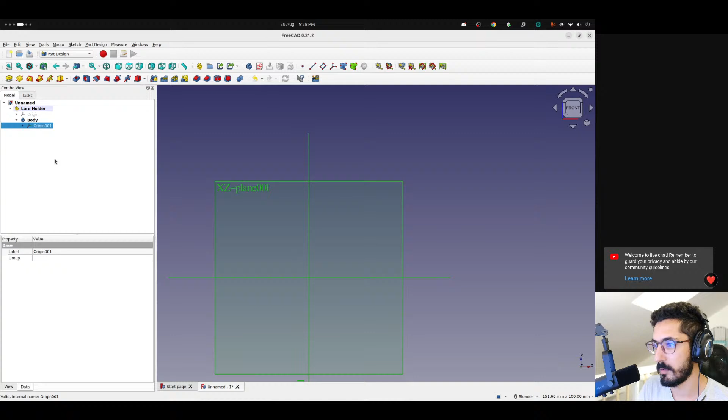But yeah, and as always, there's going to be spreadsheets, the boring stuff. I think for this lure holder we'll only need one spreadsheet. I could not rename it, but I like to rename stuff, like for example lure holder params. So here we will have the parameters for our lure holder, and from the top of my mind, just a diameter and a length for now, and then we'll get back and start adding more. So let's assume the diameter is like 15. Again, might change it. Let's go with 20, and a length of 120.

Also, I'm starting to add the units to these. I wouldn't say it makes things easier, because I could just say 20 and it will work. But yeah, this will make sure that this is actually a distance. We're gonna name this diameter, and this one length. Cool. Diameter and length.

So I think I'm gonna have it standing up. So I'm gonna go to the top, and that's one of the reasons I created a part. So let's call this the main body, for example. And we're gonna need a couple more bodies in a minute to do Boolean operations, because the thing with bodies is every single body can only have one solid inside of it. So if I want to do a Boolean operation between two solids, I must have two bodies, basically.

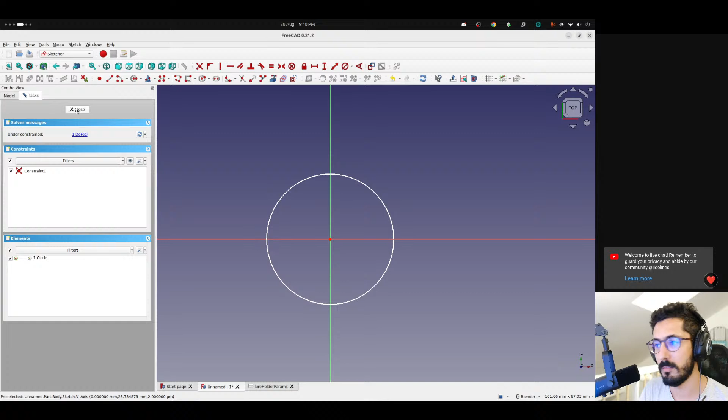So we're gonna start by creating the most simple shape possible, which is gonna be a cylinder. By the way, we don't even need a sketch for this. Let me show the origin. Technically, I can attach a cylinder from here. Attach it to the XY plane. Give it a radius, which is going to be lure holder params dot diameter divided by 2, because we need the radius. And the height is going to be our length. Cool. We didn't even need the sketch for that.

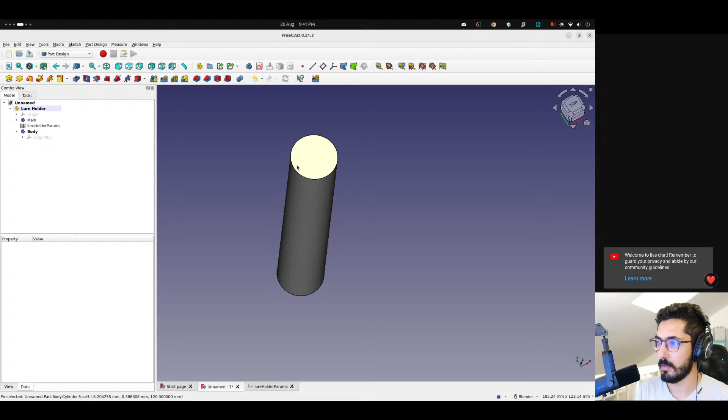And now we are going to create another body. Let's call this body. That's fine. It's active. Make sure it's active. That's important. Because I could leave it as a cylinder, but it's not gonna be strong if I print it standing like this. It's gonna be brittle because there's gonna be layer lines and we're relying on layer adhesion. There's some intricate parts here, so yeah, not ideal. So that's why I want to do a Boolean operation.

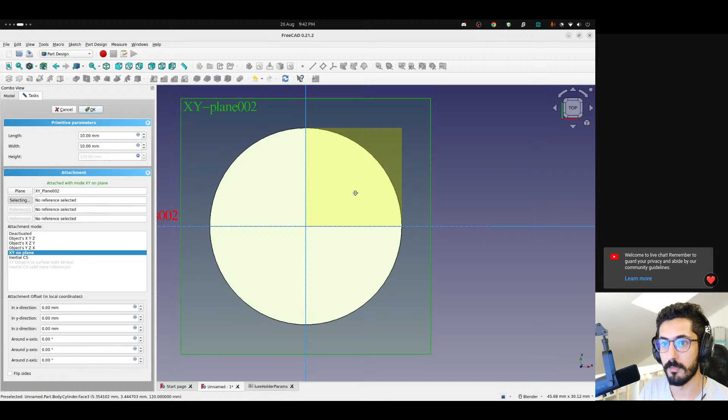So with this body activated, I'm thinking to create a box on the XY plane. So the height is going to be the same length. We called it length, I think. Okay, so it's not centered. We will fix this. 1 second. Width is up. It doesn't actually matter. So one of these will be equal to the diameter. Lure holder params dot diameter. And actually, you know what? I'm gonna add 1 millimeter, just in case. You'll see what I mean in a bit.

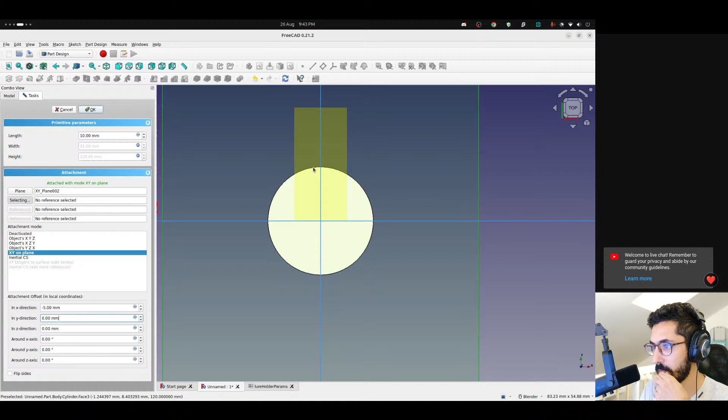Let's leave this as 10 for now, and then we'll get back to it because I don't know yet exactly how it's gonna be. But assuming this is 10, we need to go here by -5, so it's in the middle, and in the Y direction, we need to go by minus the value we entered, which is lure holder params dot diameter plus 1, divided by 2 mil. Cool. So the gap here is not necessary, but it doesn't actually matter.

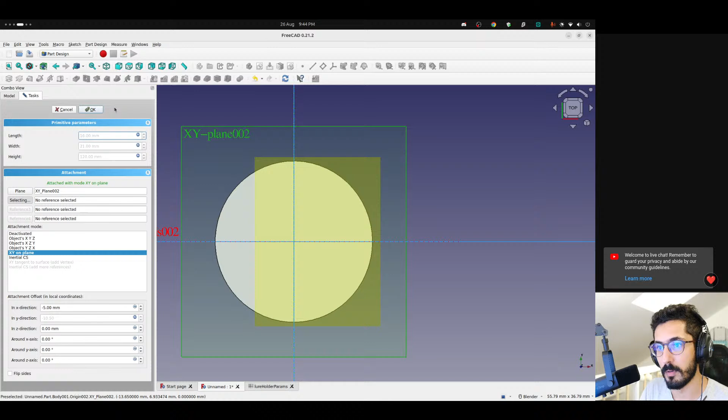Now here, I want to know how much I want to cut, because we're gonna do a Boolean operation between these two, and I want this to be something relative to the diameter. So maybe like lure holder params dot diameter multiplied by, I don't know, 0.8 probably. So we can take this value here and turn it into a parameter, let's say cutout percentage maybe.

And can we do percentages here like 80%? Does it work like that? I've never tried this, so we will figure that out. So if we multiply this by lure holder params dot percentage: cannot convert str to number. Okay, so it took it as a string, not a value. I guess this is gonna be like 0.8, right?

Or what I can do, which is even better, cut out length and then say this will be equal to length multiplied by 0.8. And then we can use that here. So that's gonna be... forgot to change the name. That's not even a cutout. Let's rename it. Let's call it box length, because the actual cutout is different. So that's gonna be the box length.

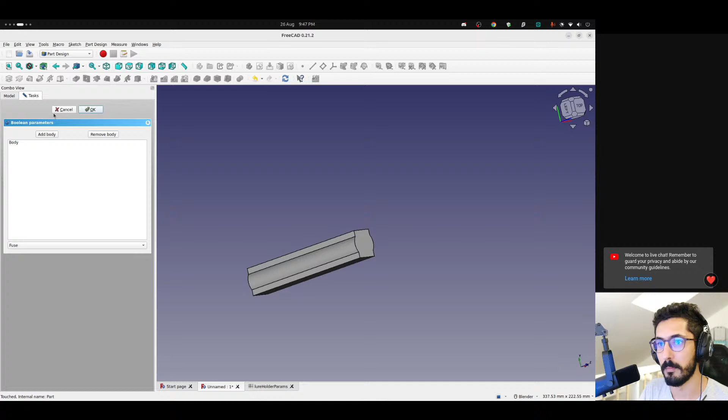Interesting. I took the length. Oh my god, it's diameter. And in the x direction, there's going to be minus the box length divided by 2 to center it. And now we have these two shapes. And if we go back to the main shape, we can create a Boolean operation. And we need to add our body

and get the common value between them. So this is going to be much easier to print because I can put it on the bed this way. So basically it's printing like that horizontally. It's going to be easier to print and much faster. Easier, faster, and stronger also, which is always nice.

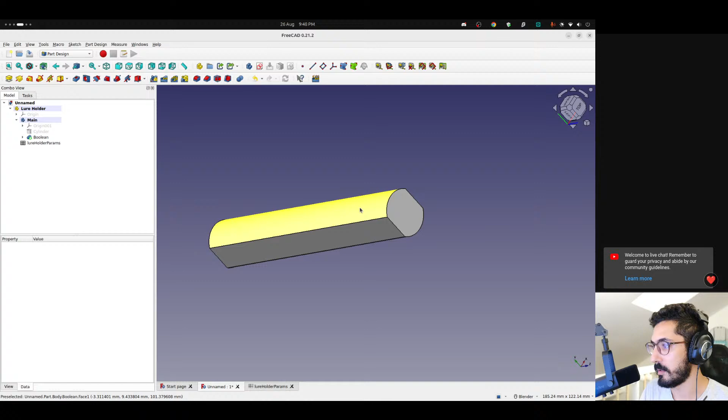Cool. So what we need to do is to also create a cutout somewhere here. We need to create a cutout. We need to add threads. And we need a way for whatever being threaded here to close this part. Yeah. I'm thinking now because maybe I shouldn't have done a cylinder. Maybe I actually needed a sketch that goes like that, but then here at the end it goes this way. Probably. We can still add it though.

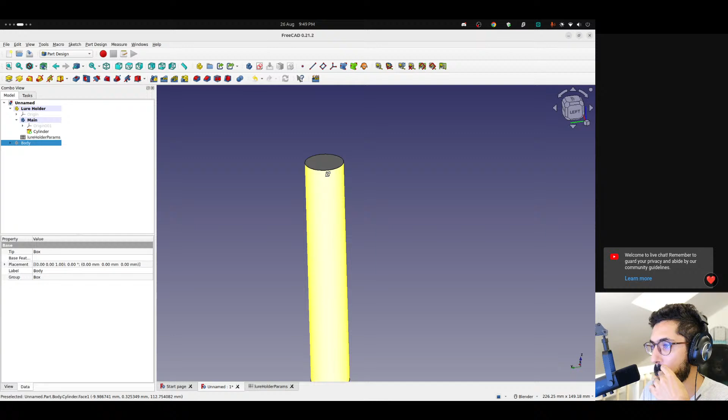Let's delete the Boolean for a second. I'm gonna hide this. Yeah, let's hide it for a minute. We can still add it by... We can make a bigger cylinder, extrude it downwards and change the angle. We don't have too much control over that. Or we can make two cylinders and loft it. That's one way. Or we can draw a profile and revolve it. So there are many ways.

But do we still need this cylinder? Okay, let's delete the cylinder and start from scratch. We actually needed that. My bad. Okay, so the total length is going to be our length. Cool. And we need the basic shape of the cylinder, the side profile of the cylinder, but not all the way up. So this right here is going to be half our diameter, which is in this case 10 millimeter.

Cool. Okay, so here's the tricky part. I was thinking something like that. But how much is it and what is this angle? So the angle, I think we can go with 45, maybe even less. And do we need a fillet? We can chamfer later actually. 45, maybe it's too extreme. Maybe something like 70. And I guess we can do something here like lip angle. Set it to 70.

I think we need that. 70. Yeah. That's how you set it in degrees. So this is going to be our lip angle. Cool. And the only thing that we need to define right now is this length. So let's call this the top diameter. And maybe 22. Yeah, so this is gonna be our top diameter.

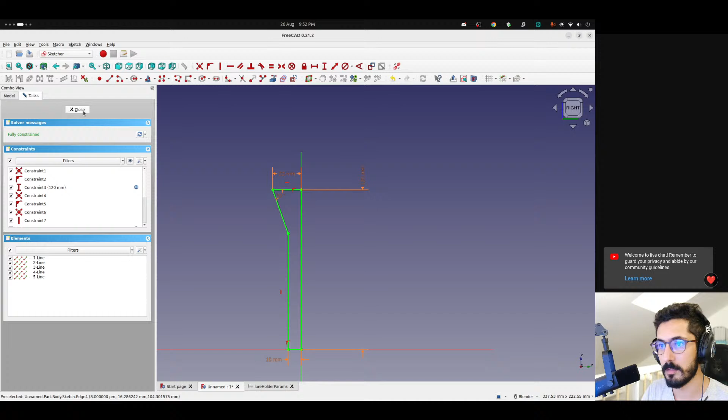Yeah, and we don't need much, by the way. I think like even 1 mil could make a difference, but we'll see, and maybe we need to reduce the angle. Maybe 45 was fine. 50. It's not updating. Huh, something is wrong. Oh, yeah. That's top diameter divided by 2. Okay, that's why. Yeah, I'm gonna leave this at 70. That's why it was weird. So this is what's gonna push the two parts together, basically. Or at least that's the plan.

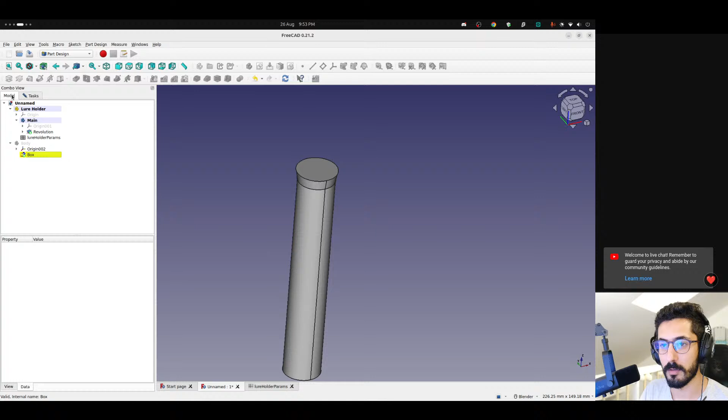Now we can revolve this 360 degrees. Maybe we can make the angle even bigger, like 80. So it's gradually going down. It's looking nice, not bad. So now we need to modify our box. Because, first of all, show me the box. Because now this is bigger, so we need the width. Is it width? We need to get the top diameter now. Top diameter, there's a unit mismatch. Yeah, this should be millimeters. Width is top diameter.

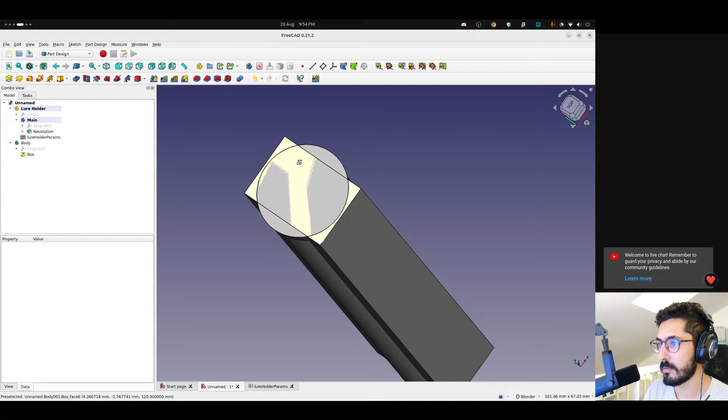And we need to change something else, which is here. Yeah, top diameter. Cool, now it's centered, nice. Now we can come here and redo the Boolean operation. Boolean, add the body, select the body and set it to common. Cool. Nice. So let's now define the cutout length. Do we need to create one cutout? I think, yeah, because it's gonna be printed on one side, so cutout should be here.

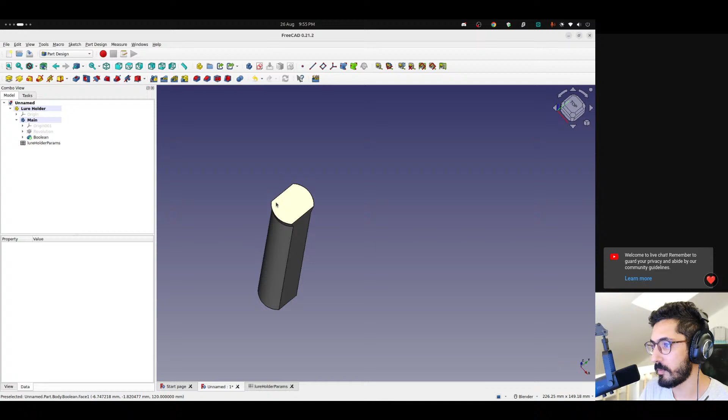So cutout length, let's do, whoops, not here. Let's do 2 mil for now, and we will modify it in a bit. And this is the, what am I clicking? Ah, come on. Here, yeah. Now we're fine. Cool. So we want to draw a sketch here. So I'm gonna create the datum plane. Create the datum plane, attach it to XY plane, and in the Z direction, we will go by the total length.

And let's draw a sketch here. This is a very simple sketch. So a centered rectangle, centered around the circle. This right here is going to be our cutout. So cutout length. And now the length of this one, let's just set it to the diameter.

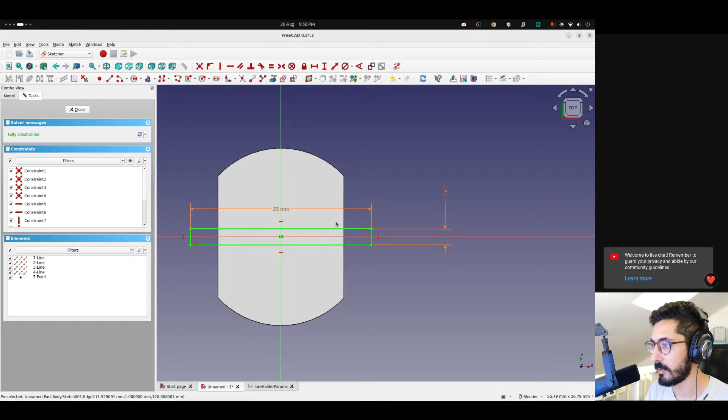lure holder params dot top diameter, and just because why not, we can add 1 mil. Doesn't matter. Close. And let's say we need a cutout depth also. Let's make this one 6 mil, probably more, 12 mil. And the cool thing about parametric design is I don't even know if I need these values to be correct. They don't have to be correct at the moment because I can change them at any time. And I like that.

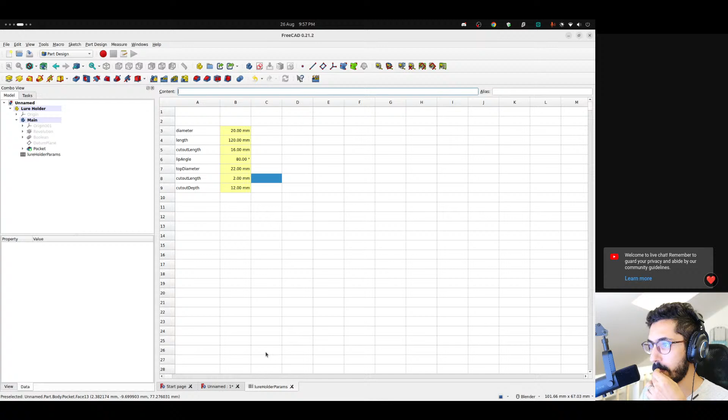So cutout depth. Nice. Now this is probably too thick and we might need to reduce the diameter or increase the cutout. Something like, let's say 3, and we have a top diameter. Actually, you know what? The top diameter, I'm not gonna calculate it like this. I'm gonna put it somewhere here.

And let's call this one top diameter offset, for example, and set it to 2 mils. This is not gonna change the actual value, but it's gonna make more sense. So this is gonna be diameter plus top diameter offset. It's still 22 mil, but we have an offset now.

So why did I do that? Because now if I change this to, let's say, 14, change it to 140, 14 mil. The top diameter is now 16. So I maintained the 2 mil difference between these two. This looks more realistic now. These two will bend a bit

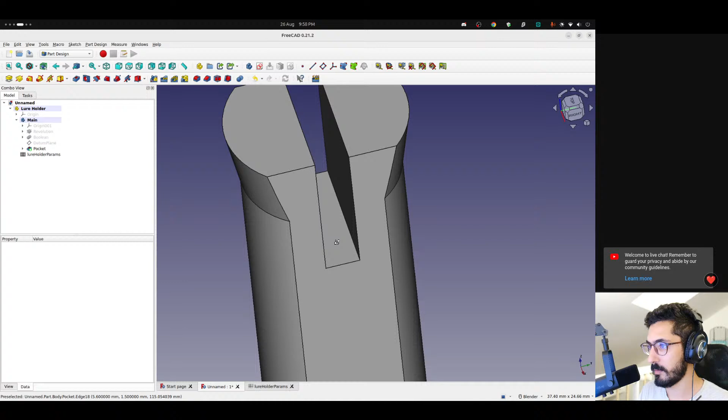and should work. Cool. So now we need to create the thread and the screw. That should be it. It should be a simple print, theoretically speaking. Now I can do everything in one spreadsheet, but it might become a bit slow, especially the thread part. So I'm gonna create a spreadsheet just for the threaded part, because every time I work with threads, it just becomes slow.

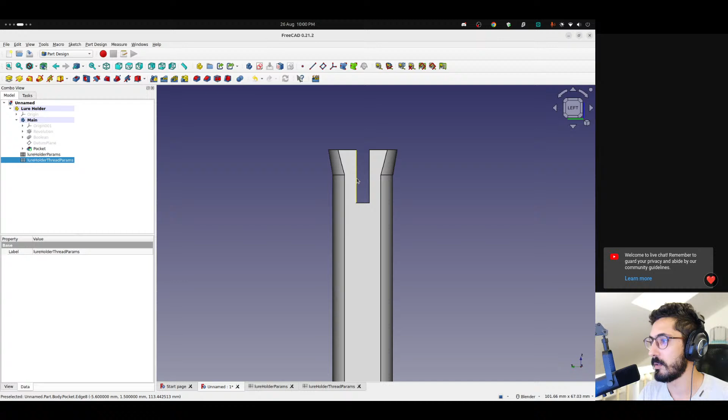Let's say lure holder thread params. So for thread, what do we need to know? We need to know, let's say, the length of this thread. So let's say it starts from here all the way up here, for example. I think it should stop somewhere below this, because if we add threads here, it's going to reinforce this section. So it might not bend well. But anyways, let's define a thread length.

Let's say it's 30. Whoops, giving it an alias. Why am I clicking all over the place today? Thread length. Oh god. Man, I used FreeCAD millions of times and now I just forgot how to use spreadsheets. Yeah, so thread length, and

probably I'm gonna start the thread right after the cutout, so I don't need a param for that. Maybe offset from cutout so we can control it. So I can set it to 0, I can set it to minus, so let's say 2 mil, for example. So the thread will start 2 mil from here, somewhere here, and then it will extend 30 millimeters down.

And usually I like to create these threads as a circle, so let's give it a threading diameter, for example. It could be like 2 mil. Again, we can control these values, so that's fine. And let's add a tolerance of 0.2 mil. That's the threading diameter, that's the tolerance right here. Cool. Thread length, offset. I think that's enough.

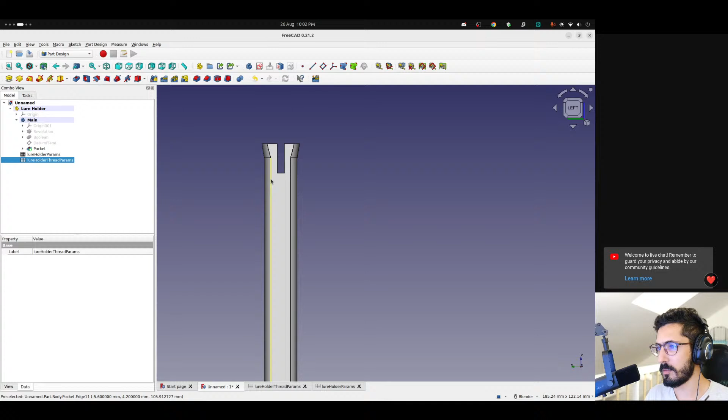So the thread will be here. It's gonna be like a reverse of what you usually see on bottle caps. No, actually it's the same. Anyways, let's draw the profile of the thread. It will start from this edge, for example. Now I'm thinking if I do a boolean or not.

Yeah, I think the boolean operation has to be the last thing. So I'm gonna delete the boolean and hide it for now. So this is gonna be like a perfect circle. We're gonna do the thread and whatever changes we wanna do here, and then we do the intersection.

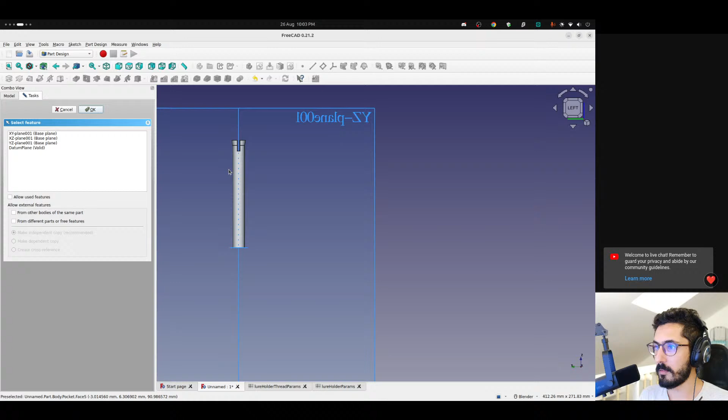So let's create a sketch here. We're looking at it from the right. I don't think it matters. Yeah, it shouldn't matter. So we are going to create a circle. This circle will have a diameter of lure holder params or thread params, threading diameter.

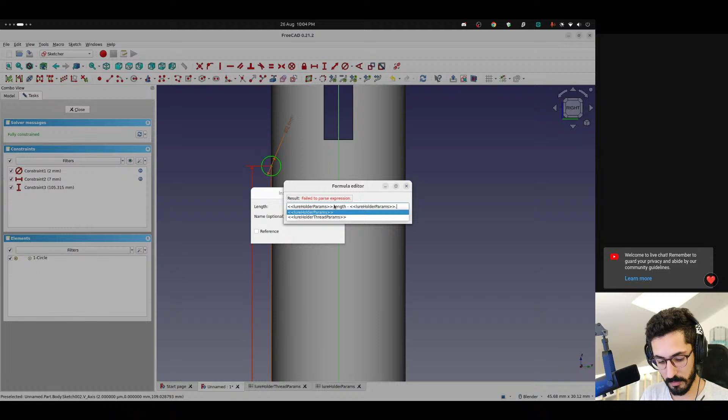And where do we want to put this? So we know that the distance from here till here is basically our diameter divided by 2, the radius. So now we cannot move it left and right. And where do we want to start? So let's go from here to here on the vertical distance. We want to go up by the length, so the full length minus. We need to remove the cutout length or cutout depth.

Oh man, these names are confusing. Sorry, my bad. This should be height and this should be depth. And there should be no length. This should be width. Anyways, and we also need to remove from the thread params the offset from cutout. And I have a typo here. Let me fix that. Cool. So now this should be exactly 2 mil away from this line because this is what we specified here.

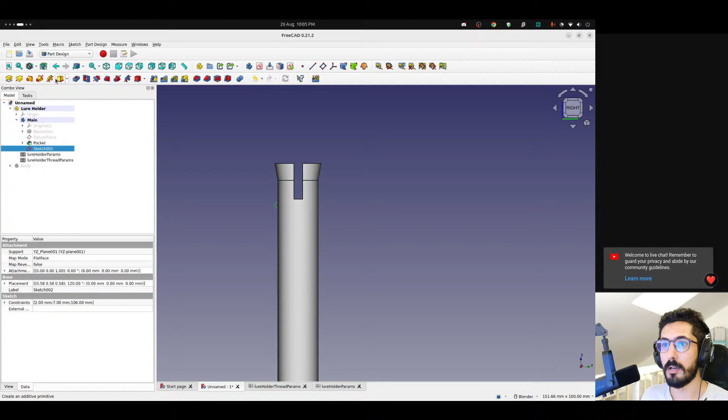So if we close this, I just want to remember that it's on the right side. Looking at the right side, it's on the left of the thing. Cool. Now we can create an additive helix. Okay. I thought it failed, but it didn't. Yeah. So we need to reverse it so it goes down. Nice.

And we have pitch height angle. Height turns angle. Pitch turns angle. I think, yeah. We have the height, we're missing the pitch. So let's set the height for now. And this is called thread length, which is going to be 30 mil. And regarding the pitch, yeah, this is gonna be a param. So I'm gonna set it to whatever for now.

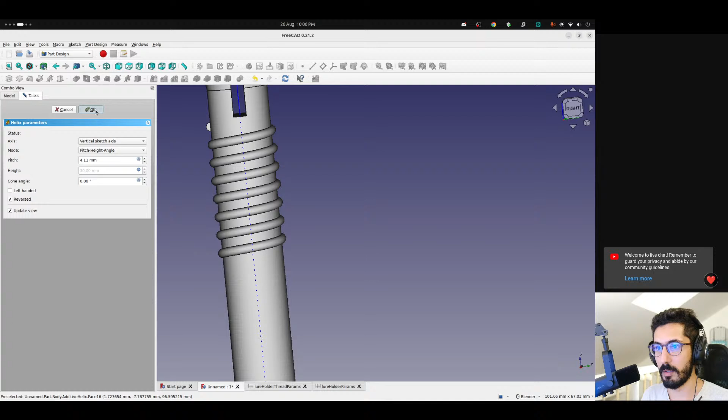And then let's create pitch, and I should save now. Let me save because we're getting into dangerous territory. Let's call this painting accessories because we might add some stuff later. Lure painting accessories, copy that, save it. Let's do a pitch of 4.

So you see, whoops, no. You see it's getting slower, this spreadsheet, and that's why I decided to create a new spreadsheet instead of adding the values here in this one. This should be fast now. Like, for example, if I set this to 10 or not. Anyways, we haven't applied the pitch, so let's do that. Set it to 4 or whatever the value in the spreadsheet is. And now we have our screw or our thread.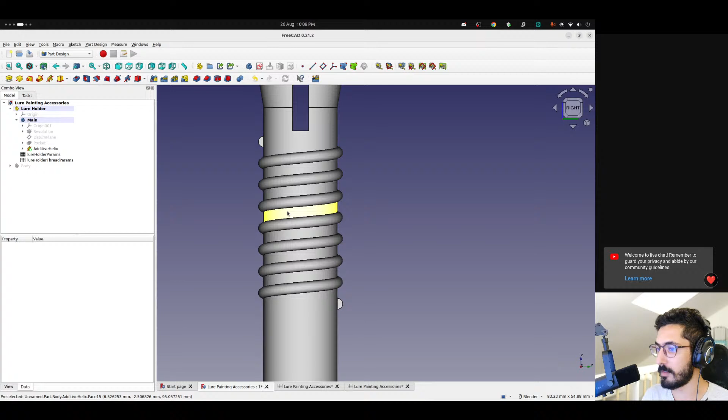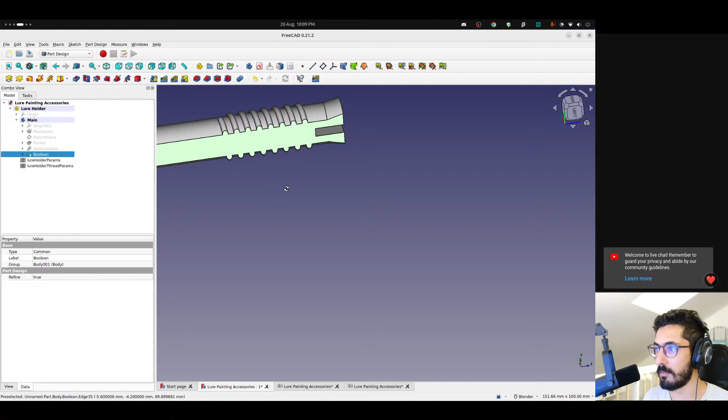We haven't created our screw yet, which we will do. So for the screw, I think that's gonna be all for this section. So I can just go ahead and create the boolean, add the body and get the common and hit OK. Yeah. Yeah, we have a problem here. We have a slight problem here, which we might be able to fix in a bit. No, actually, no, we don't. Because I can just print it on this face. This will not work because of this overhang right here. But if we print on this face, we're fine. Cool. We don't have to do anything. Nice.

Now we need to create the screw, so we need a new body. Create a new body. Let's call it screw or lure holder screw. We should rename this, but it doesn't really matter at the moment. Lure holder screw. I want to move this up here.

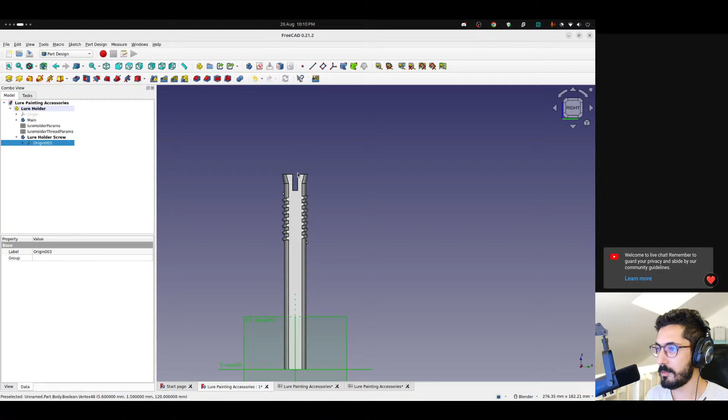I'm thinking though, if I start it from down here, or do we start from the top? I think we should start from the top. Yeah. So let's just move it by, we can change that if it didn't work. So lure holder params length, which should be height. And now we're up here. Okay. Okay, and do I need to add the tolerance? I don't think so. We can add it also. I think we're fine.

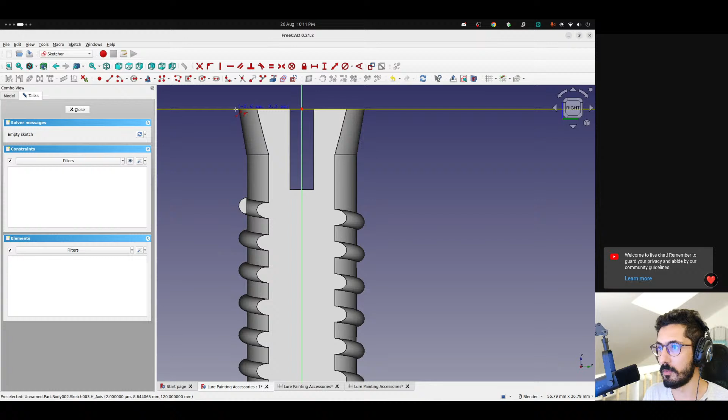So regarding this screw, we are going to do a similar thing to what we did with the base profile of the cylinder, where we had to draw this. Something like that. And this one go here, and this one go here. Now the biggest problem is gonna be the threads. Because the threads should... No, it's not gonna be like that. Because we need thickness. We need to draw another. Yeah. Let's close this.

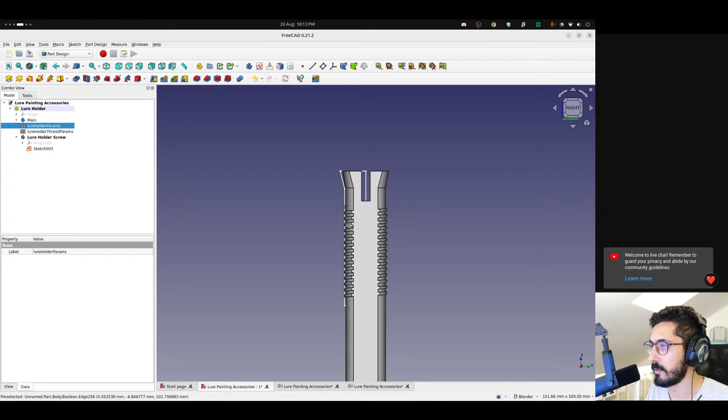Maybe we can increase the pitch also. So we can double this, I guess. Or let's go with 6. Oh, sorry. We need to decrease this, not increase it. So 2. Yeah. Something like that. Now, the thing is, we're gonna have a thickness. So if we come here, we have some constraints. Wait, this one. If we remove that, yeah, so these two are together. And this one is here.

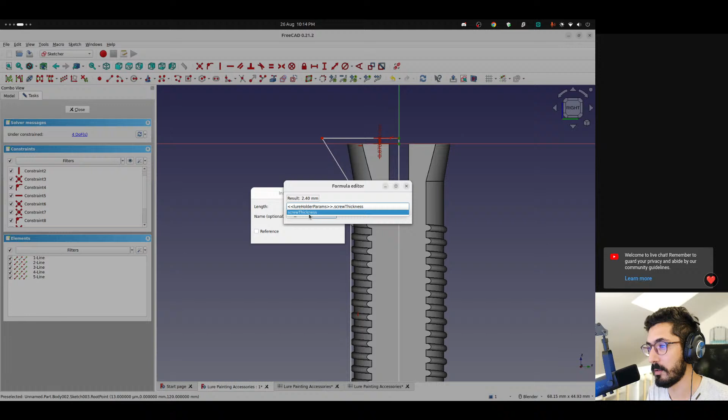These two are together. Whoops. And this one is horizontal. Cool. This might be a bit tricky to do here, this section. But let's... this is going to be lure holder params dot thickness. We need to add tolerance somehow. So thickness, do we add it here? I didn't add tolerance there. I added it in the threads, right?

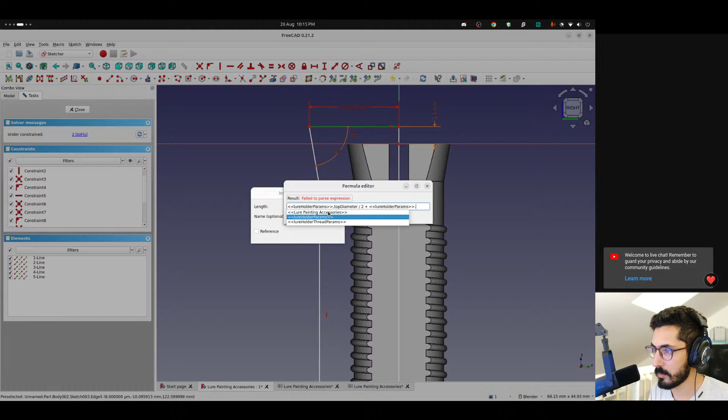And the angle here, if you remember, was... where is the angle? This was lip angle. And this here is the lure holder params dot top diameter minus, no wait, it's top diameter divided by 2 plus the thickness plus tolerance. Wow, that's too much.

And now we need to basically just define, whoops, what's going on? We need to define this from here to here. So to make things easier, I think I can calculate this. This is cut out, so let's close it. So the length from the cutout till the end of the thread, we can put it in the thread params because here we have easy access to thread length. We can add a value here. Let's say this is equal to cutout depth plus offset from cutout plus thread length. And let's call it length from top to thread.

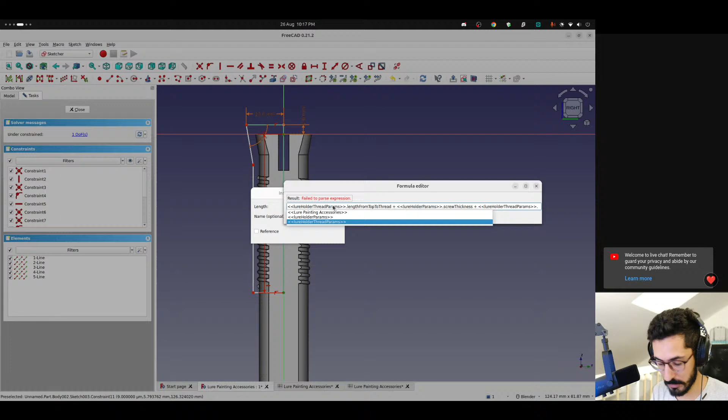These values will make things a lot easier. So if we come here, the distance from here to here is the length from top to thread plus the thickness of the screw. I don't think we need thickness here, but why not? We're adding thickness everywhere. Plus the lure holder thread params, tolerance. So this way it hides the screw when it's closed. But actually, no. We don't need that.

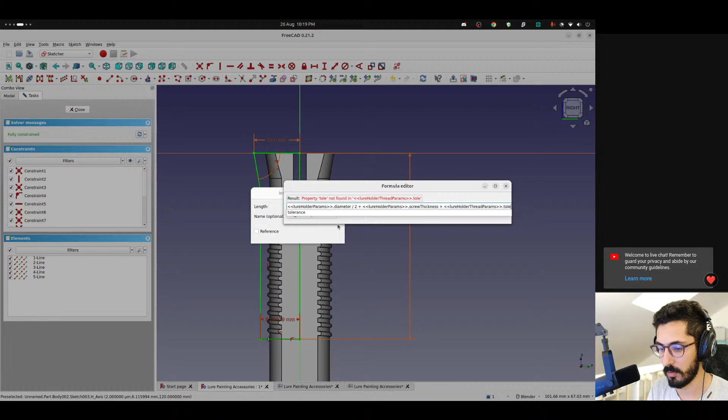Yeah, I messed up a bit, even at the top. Because even this, I don't think it should be like this. The only place we need to add thickness is on the sides. I don't know why I did it like this. Yeah, my bad. So this is gonna be here, and here we need to add thickness. So distance here is going to be lure holder params dot diameter divided by 2 plus lure holder params dot screw thickness, and we also need the tolerance. I don't know why I'm slow today, but it is what it is.

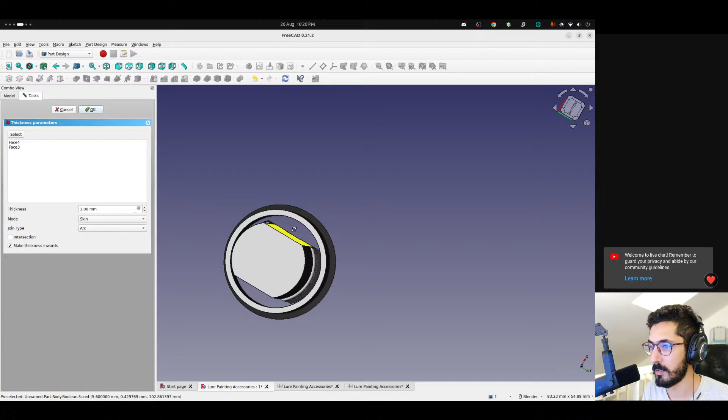And here's the thing. I can close this now and revolve it. Hit OK. And then, for example, I can click these two down here and, where is it? Thickness. And give it a thickness. This will work, but it's not gonna be parametric. Oh well, yeah, it has to be inwards. My bad. And this value is wrong. It's lure holder params dot screw thickness. That's the actual value before cutting out these two. So this will not be parametric. If I change some stuff, it will definitely break.

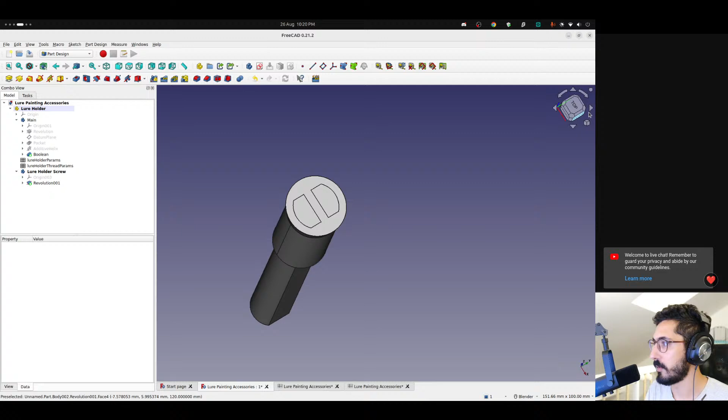So how do we fix that? What is this? Why did it do this? Anyways, let's cancel. Another way is to create a new sketch on any plane and redo what we did. But this time we are going to trace the edge. So down here, here, up here. This is an easy one. Length from top to thread. This is also an easy one.

This is the lure holder params diameter divided by 2 plus, we're only gonna add tolerance here, not thickness. And the angle will always be the same, the lip angle. And this one is also an easy one, which is the top diameter. So you see, it's a bit of extra effort to make it parametric, but it's not that bad. Now we can revolve, but we'll use the groove, which is like a negative or an opposite of the revolve. It will cut.

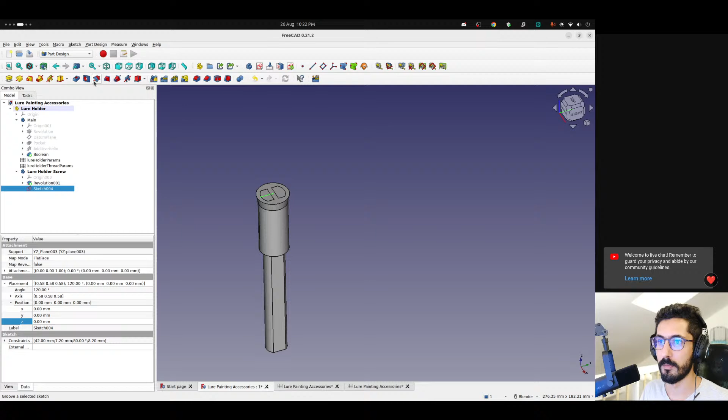And now we can measure it from here to here. It's 0.2 mil, which is our tolerance. Clear dimensions, and if we measure from here to here, that's 2.4, which is, did I put 2.4? Yeah, screw thickness. Cool. All that is left to do is to create the cutouts for our screw.

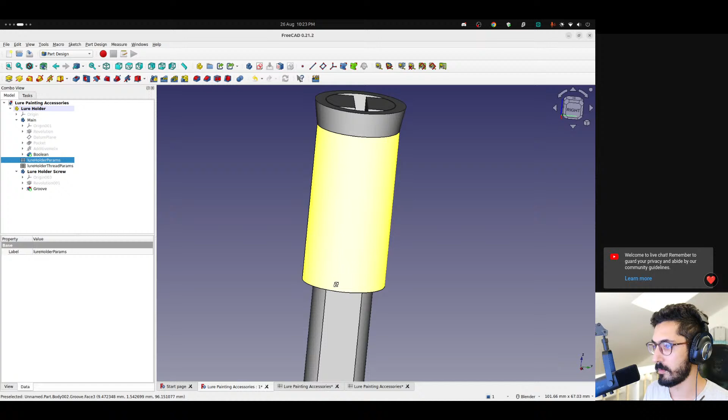So we are going to create a sketch. It was starting from the right side, right here on the left. I think this is what I remember. So the center of this circle has to be the exact center of the old one. So we don't want to use any tolerances or anything here. So it's just this way. It is going to be lure holder params dot diameter divided by 2, and this way it is going to be lure holder params dot cutout depth plus lure holder thread params dot offset from cutout.

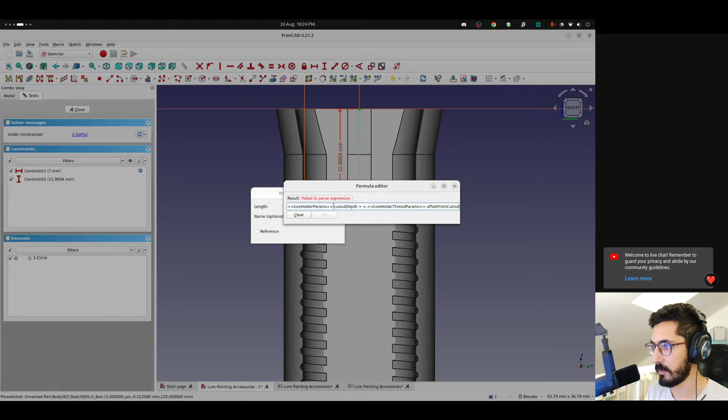And I made another typo. So as you can see, this circle is exactly in the center. Now the diameter here is going to be whatever the diameter of this circle was, which is the threading diameter, but we need to add tolerance multiplied by 2 because we're dealing with the diameter and not the radius. Cool.

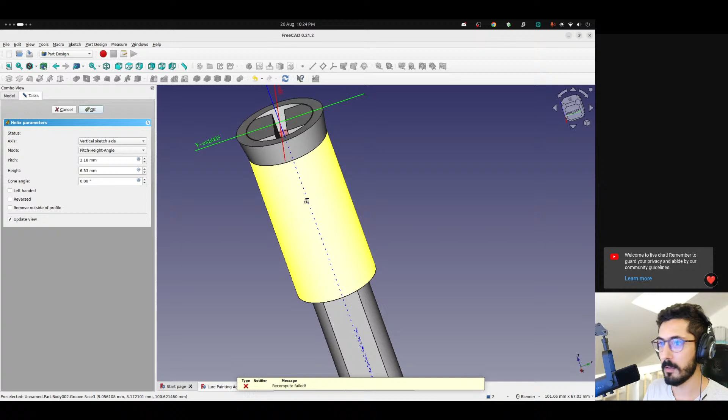Now we need to use the subtractive helix, and it has to go in the reverse because as you can see it's trying to go up, so we need to reverse it. And let's start with the height. This is going to be the thread length, and the pitch, it might take a while to calculate. This is going to be the pitch. Now we need to validate that, yeah, you see, it's like that. It should be like that all the way through.

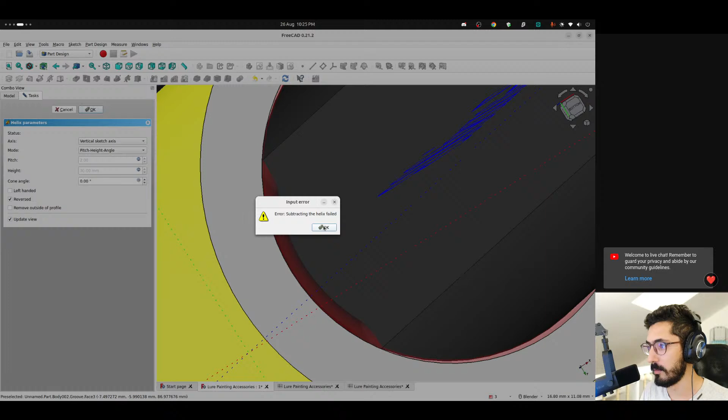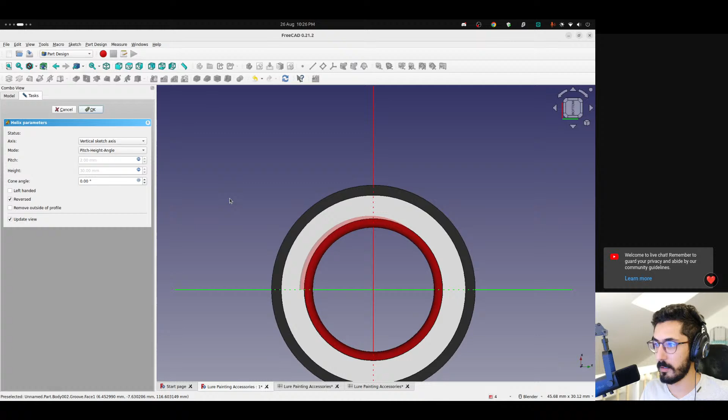So if we hit OK, we can do a section view. Huh, it failed. Why did you fail? Subtracting the helix failed. This is interesting. Why do you fail? It should work. Theoretically. Interesting. Okay. It is not liking that. Cancel. Nothing wrong with the sketch. Nothing wrong with it at all.

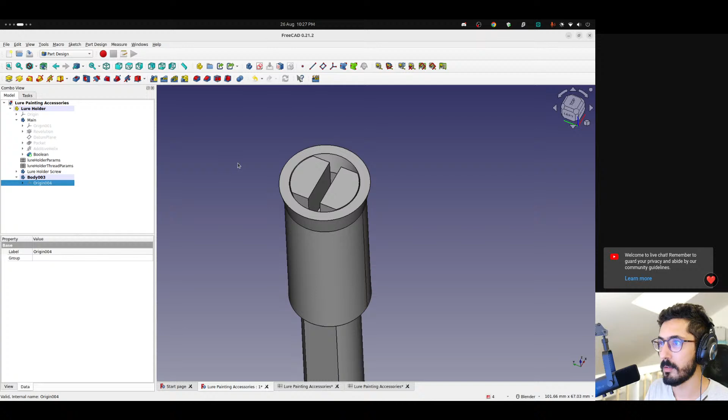What we can do is we can create a new body. Maybe I should have created a part here, but anyways, I can create a new body. Let's make it active. And let's draw a sketch on this plane. We have to redraw the, I'm just testing something. It might not work, it might work, but let's see. I want to redraw this circle. Let me hide it though, so it's not distracting. Now we're doing it from the bottom. So from here to here, that's going to be diameter divided by 2. I don't know why the thread failed. Usually it doesn't. Usually it works.

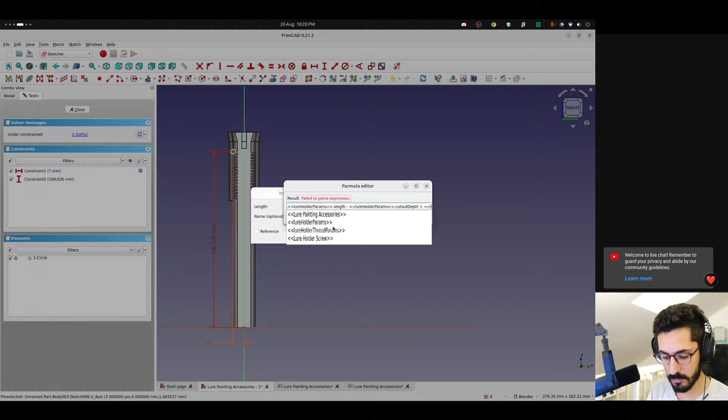So take the length, remove the cutout depth, remove the offset from cutout, and I missed something, right? No? Why? So it's length. Did I add instead of, yeah, I added. Should be minus. Cool. And now the diameter. Diameter plus tolerance multiplied by 2.

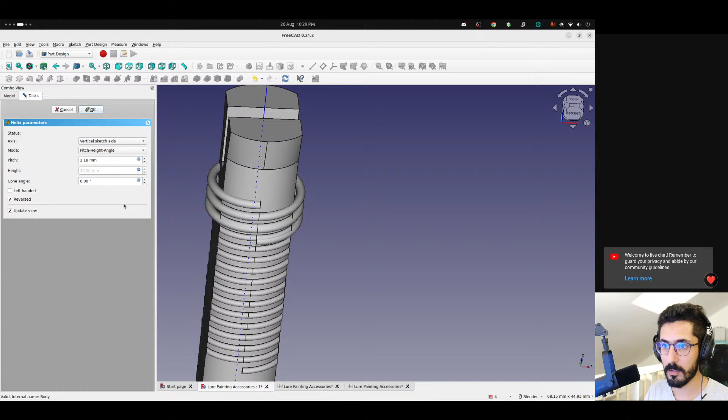Nice. And now we can do an additive helix. So let me hide the screw just to see what's going on. We want to go downwards and do the exact same thing. Let's do the height first. The thread length. And the pitch is going to be pitch. So these should match, and they do match. Click OK.

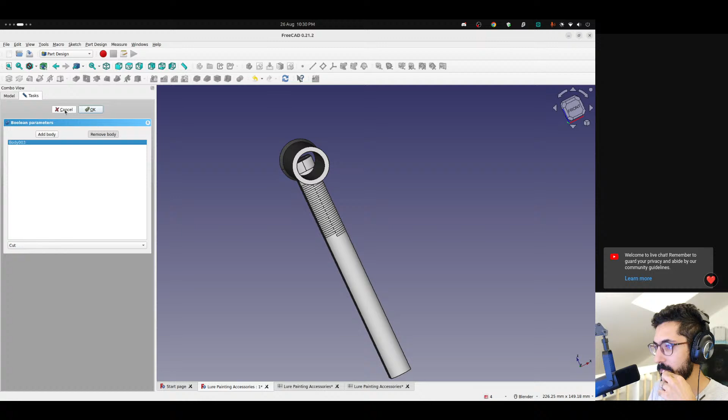Okay, so if we take the screw, make it active, and do a Boolean, and let's cut. And it failed. Why? What happened here? Boolean with body 3. It is not liking that helix. Is it because of the origin? So if I move this body up to up here, and now we modify the sketch. So we come down here to

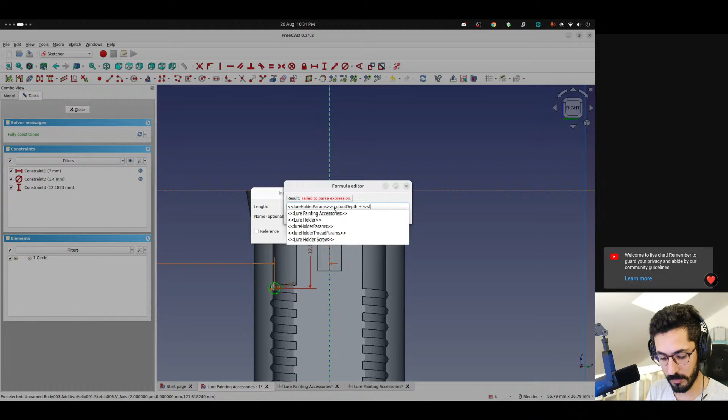Man, FreeCAD has to resolve these stupid issues because sometimes it's just super annoying. Okay.

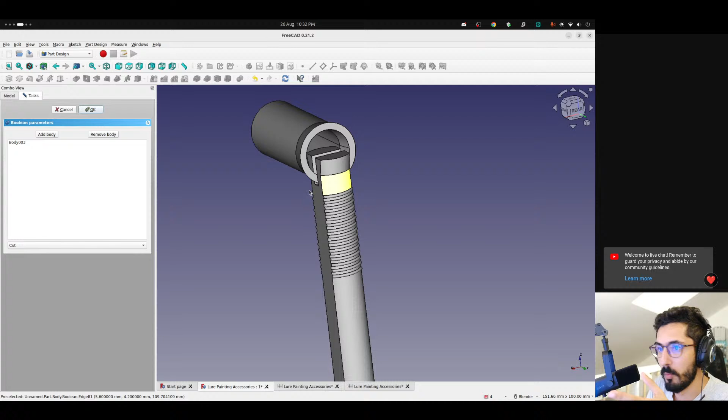So if we try to do it again, will that work? Where is it going? Like, seriously, why? Wait, did it work? Okay, so now at least it did not change orientation. Oh, wait. No, it's not the case. Why would it even move? That's so stupid. And why do I even have to do a boolean? Because we can just groove it or do the subtractive helix. Sorry. If we groove this, will it work?

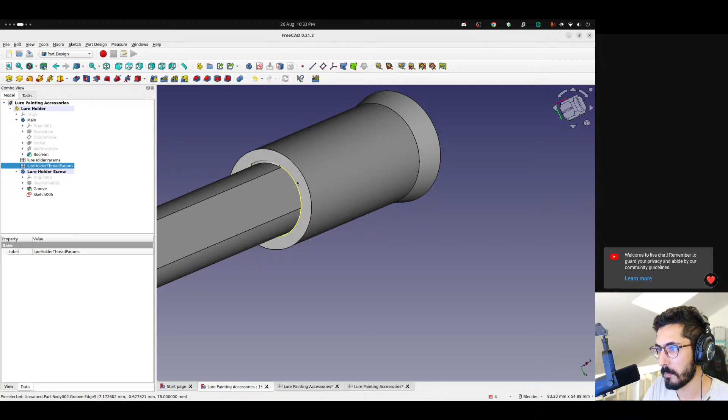Or wait, let's try something. Let's try lure holder thread params. Let's try increasing the pitch. Maybe that's causing issues. And this should be in millimeters, right? Okay. So if I take that sketch and do this, reverse it, recompute failed, wait. Okay, so I can do a helix, but the problem is with something here. Thread length and pitch. Okay, so it worked.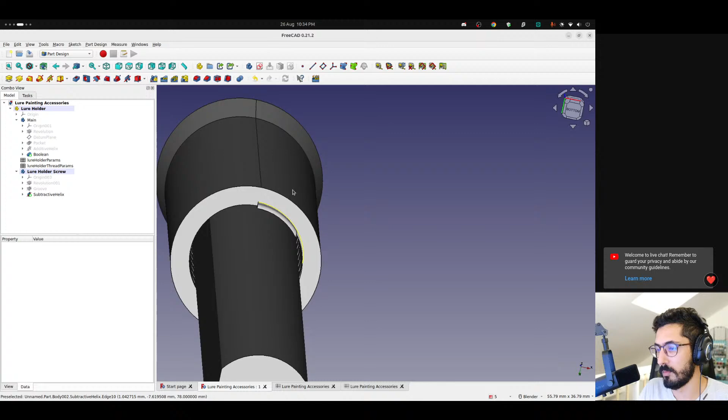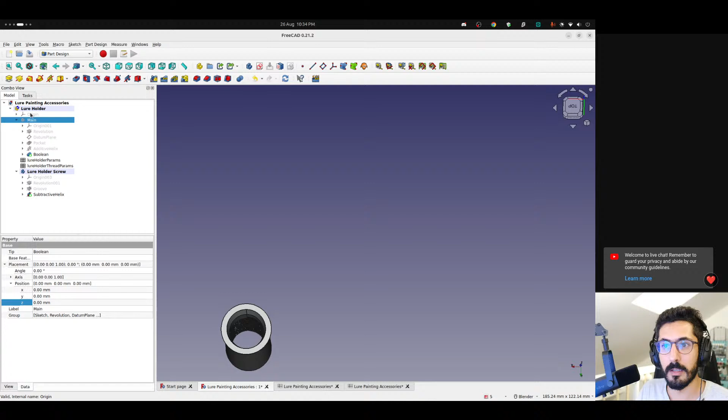Apparently not all pitches and lengths will work. So I guess we need to just experiment with it. If it failed, change the pitch. Let's hide the main body and see how it looks from the inside. Nice. And this will print nicely. For this part, I'm not super worried about the layer adhesion, so I'm gonna actually print it like this. Or the other way around, it doesn't matter. And these will print very nicely because they're not full circles. They're not even half circles. There's tolerance. Anyways, so that's the idea.

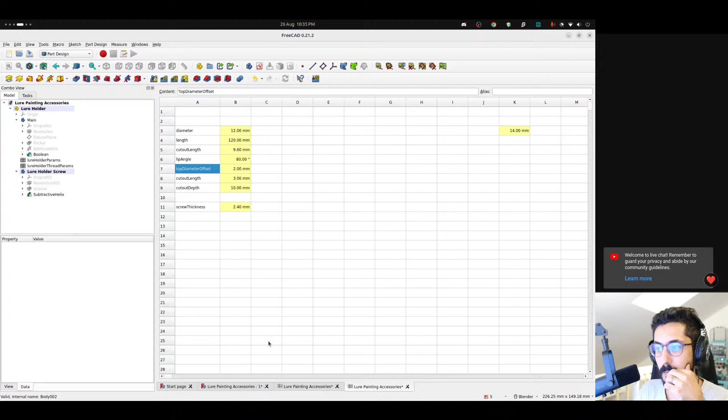I'm hoping that it works, and then we can design something to hold it in this thing, basically, and put 6 lures, 10 lures, 20 lures at a time being painted. Now let's see how parametric this is. So I'm gonna save, and let's, for example, go and change the diameter. If it's completely parametric, nothing should theoretically break. So let's make this 12. Might take some time to recompute everything. It's finished. Cool. Now we have a 12 mil rod. Oh, I can't speak today. Let's change the length. Let's make it shorter. Let's make it 100.

Cool, it worked. Nothing is breaking. I don't want to mess with the thread at the moment. Actually, you know what? Let's mess with the thread. Let's make this screw shorter. So thread length, let's make it 20 mil.

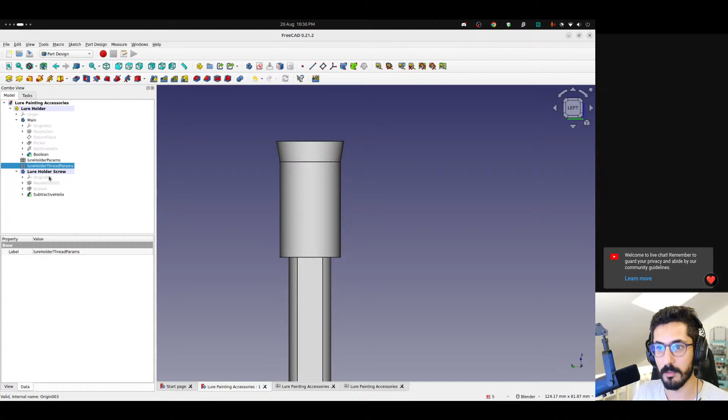Okay. Let's see if anything broke. No, all looks good. All looks good here. It's printable on both sides, actually. Oh no, this side is not printable. Only this side. I think that's always the case. Yeah, cool.

How much time do you think this will take to print? I think it's going to be super fast. So if we export this, yeah, let's just export it like that. Okay, and then the screw. Export. Let's call this one screw instead of all of this. And I think I have a 0.4 nozzle at the moment. I removed the 0.6 because I was testing something.

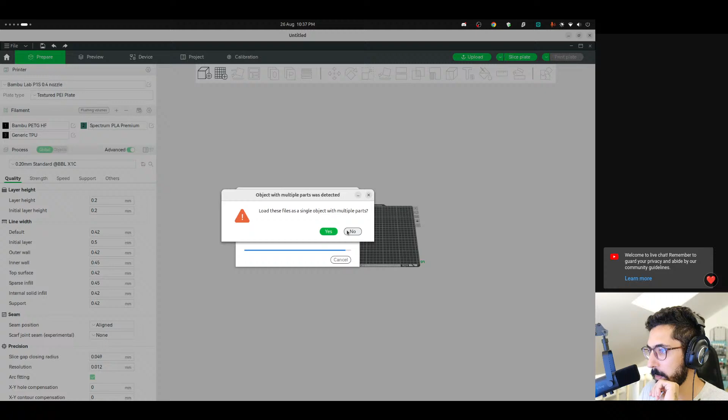Okay, so you will be printed on this side and you will be printed on this side. This is Bambu Lab PETG High Flow and I have calibrated it, but I think I'm gonna use PLA. I don't know yet. Yeah, speed is gonna be a problem. PLA is gonna be a lot faster. 27 minutes. Oh, even on PLA, okay. Layer time is what, 4 seconds? Layer time, 4.5 seconds, okay.

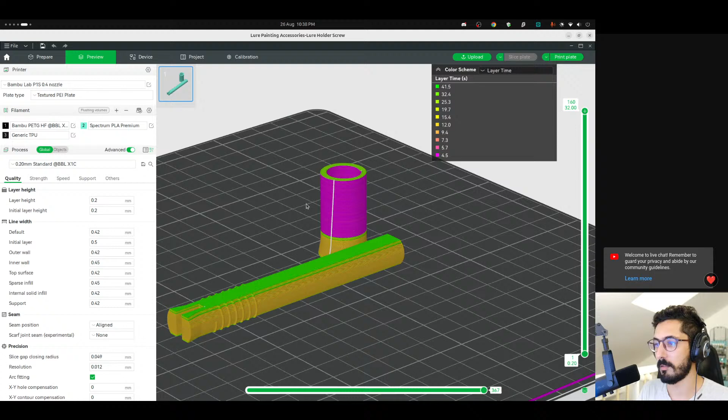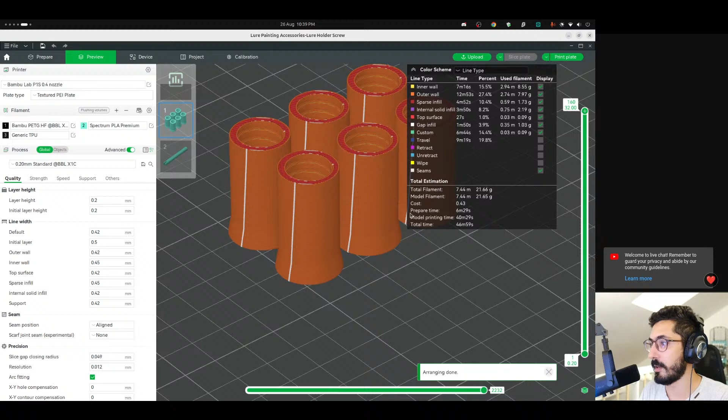Interesting. So I guess these will be printed like that. It's gonna be much better. I mean, in the actual real world scenario, it's gonna be something like this. Printing 6 at a time. In that case, we don't have the problem of the speed. Yeah, it's gonna be doing 200 millimeters per second. So it's gonna actually print them faster. Remember, each one of them I think was 20 minutes. Now 6 of them will be 40 something.

Yeah, I'm gonna print this tomorrow and test it. It's too late to print anything at the moment because the printer is very loud and I don't want to disturb the neighbors.

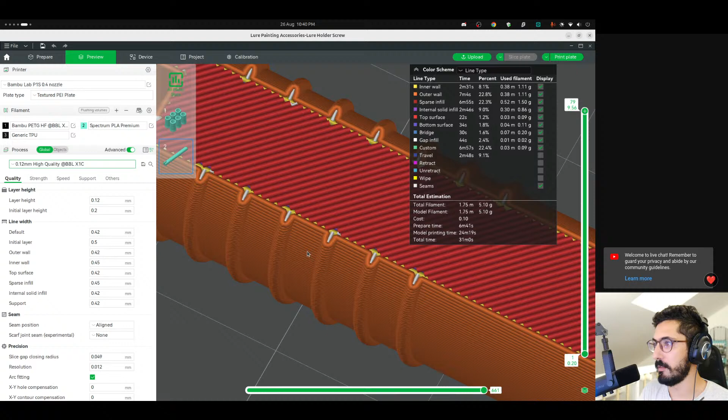One thing we can do here is maybe we can reduce this, to 0.12. Yeah. Maybe we can make these bigger. So in the thread, we can make this like 1.4 mil. Hope this will not break anything. It didn't. Cool. Yeah. Huh. Oh no, never mind. That's not an issue.

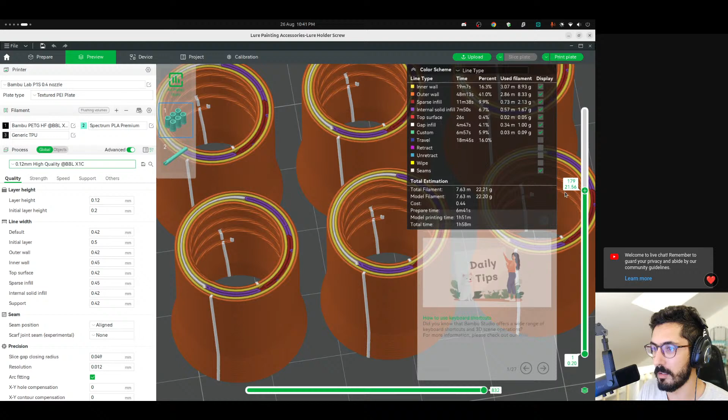Maybe the thickness is too much. Let me see it, wait. Oh, I thought the live stream is done. Yeah, we can make it thinner, definitely. So the thinnest part here, we have 1, 2, 3, 4, and some gap. 4 walls. Yeah, that's too much. We can go thinner. Come on. Lure painting params, cutout length, thickness. Let's do 1.8.

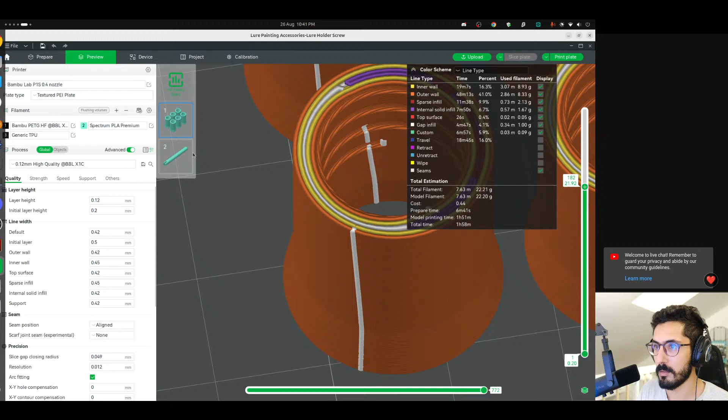Let's export now. So this is the main. Place it. And this is the screw. Place it. And reload from disk. Yeah, we can also turn on Arachne. Nice. Yeah, this is much better. Much better.

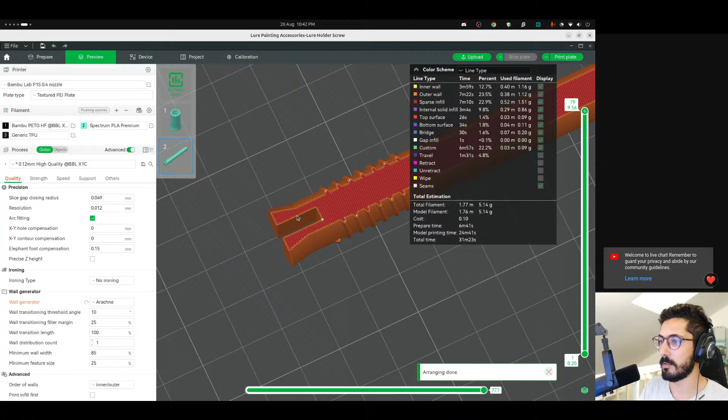This piece right here might still be too thick to bend, or I might even increase the length of the cutout. We'll see tomorrow when I test it. We'll keep you updated. I will send this to my supporters on Printables so they can also maybe test it. I will send the FreeCAD files or the models. We'll see. And once I'm 100% sure that it works, then I will release it on Printables so you guys can use it.

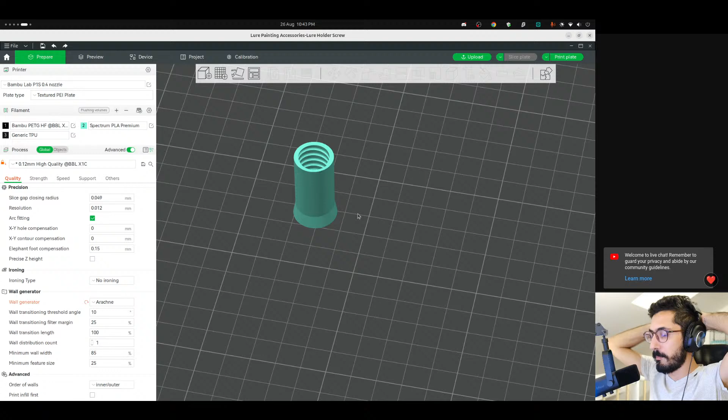And I guess that's all for today. Maybe next week we can do the holder. Not the holder, the thing that will go on the wall. Maybe I will do it before next week because I actually need it. We'll see. I don't know yet. But yeah, that's all.